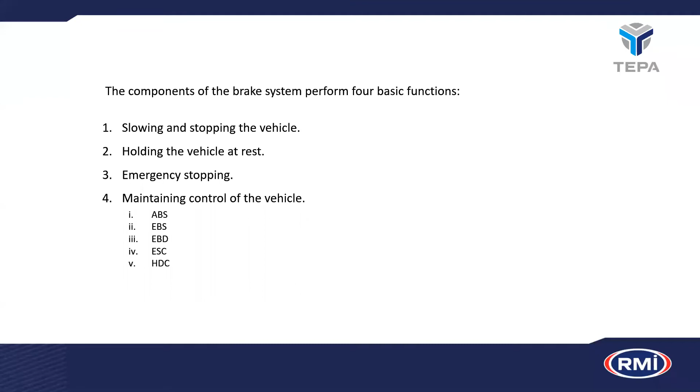So let's look at brakes and the basics. Basically, two things rubbing against each other under pressure equals friction. That's obvious - if you rub your hands together, you get friction. Friction causes heat. Science says that for every action, there's an equal and opposite reaction. So anything moving in one direction has got a force pushing against it, moving in the other direction.

Science also says that energy is neither created nor destroyed, it is only ever transferred from one form to another. The types of energy we deal with in a motor vehicle are kinetic energy, heat energy, sound energy, electrical energy, and potential energy - those are the five main ones.

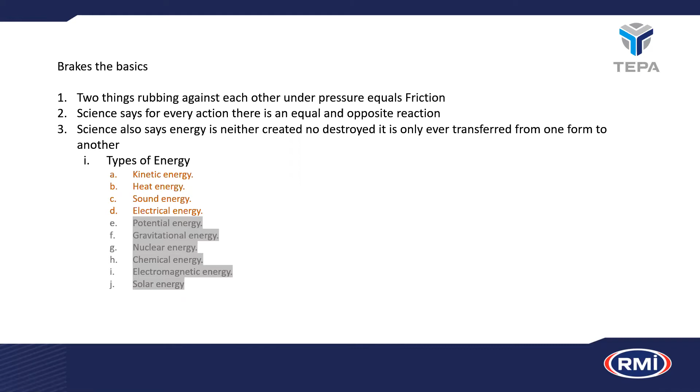In braking, we're specifically concerned with kinetic energy, and kinetic energy is measured in joules. The formula is energy equals a half mv squared. Half m is half the mass of the vehicle, v squared is the speed or velocity of the vehicle squared. So the energy of the vehicle is half the total mass times the speed squared.

Therefore, a 2-ton bakkie traveling at 120 kilometers an hour, in joules, would be calculated as: half of 2 tons is 1,000 kilograms. The velocity or speed squared of 120 kilometers an hour in meters per second is 120,000 meters an hour, divided by 60 gives you 2,000 meters a minute, divided by 60 gives you 33 meters a second.

We square that, we get 1,089 as a figure of meters per second squared. So then we multiply the two together and we get a total of 1,089,000 joules of energy.

Which is, in your terms, enough to boil 4 liters of water in 11 minutes using a 2,000 watt heater. So 11 minutes to boil 4 liters of water is the equivalent of what you use to stop your vehicle in the 2 or 3 seconds it takes once you press the brake pedal.

By example and comparison, a Formula One car of 1,000 kilograms traveling at 240 kilometers an hour has 28 times the amount of joules that needs to be dissipated during braking. Hence, if you watch Formula One, you see the brakes glowing red hot when they come into a corner at high speed, because of the amount of energy that vehicle is displacing.

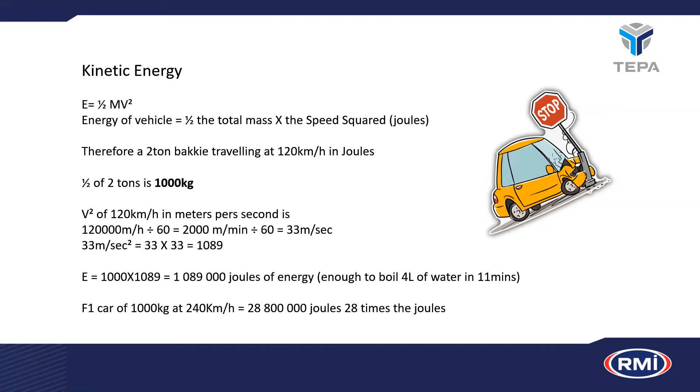Let's have a look at the brake components now that we've set the scene for how significantly important braking is to us. In the disc brake caliper assembly system, we have the bleeder screw, caliper, dust boot, piston seal, piston, brake pads, anti-rattle clips, and rotor. That is a complete disc brake caliper assembly system.

All the components that I mentioned there have to work together correctly at the same time. Brakes are not merely the brake pads that you see in the center. It is all these bits and pieces that are components of the caliper, all have to work together and perform a function at the same time for the brakes to be effective.

If there's any form of dust, dirt, rust, grunge and grime inside the caliper on any of the surfaces, the brakes will stick, the brakes will squeal, the brakes will not function properly. You'll have vibrations that feel like metal to metal, even though your brake pads are still thick enough. So I reiterate again, the concern is that everything inside the caliper must be clean and functioning, and where necessary, correctly lubricated.

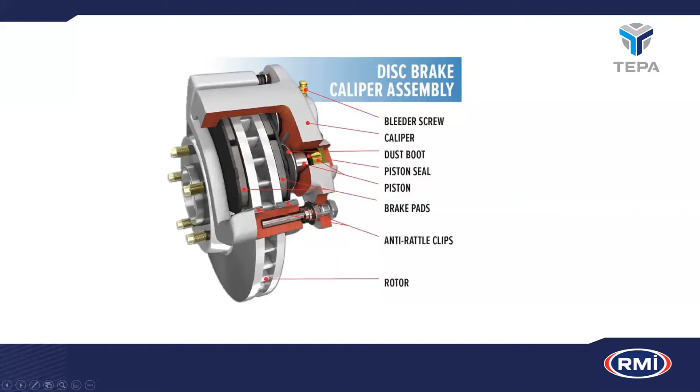In the drum brake system, you've obviously got the brake shoe, the wheel hub, the backing plate, and the brake drum. Inside, behind the wheel hub, you have your retaining clips, your return springs, and your wheel cylinder. All are, again, components that have to work together.

If any of these components are dirty or damaged or not functioning the way they should, you won't have effective braking. So in essence, when changing brakes, when doing a brake job, it's not sufficient to just change the friction material that you see and assume is worn out. All the components need to be checked carefully and replaced where necessary.

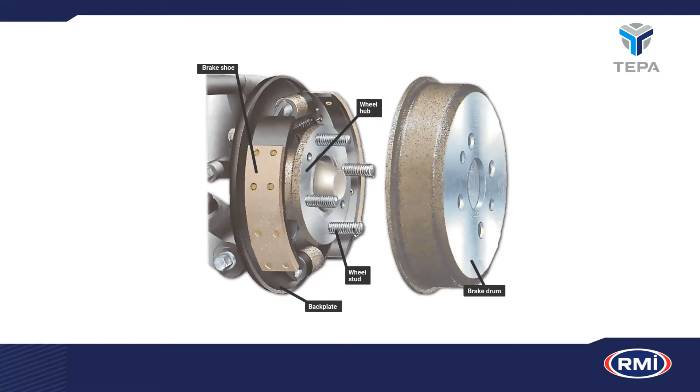So let's move on a bit more into friction material. In brake friction material, we have approximately 130 chemicals, with an average of between 22 and 35 of these chemicals used in different selections depending on the type of friction material the manufacturer is trying to achieve. In the mix, you have binders, abrasives, performance materials, fillers, and structure in the compound.

On the right-hand side of the picture, the greenish-looking image gives you a microscopic view of how those components are all mixed together. And if you had to take a photograph and magnify a piece of cake, for instance, or a biscuit, you'd see a very similar pattern where all the components are mixed together and form a compound similar to brake friction material.

If we look at the surface, what you see below is basically a gray surface with a little bit of undulation across it. On the right-hand side at the bottom, you can see what that surface looks like when you magnify it deeper, and you can see the structure of the material is rough. It looks rough under magnification, and you have places where debris collects, and places where the material can be at different levels.

Now why do we use so many different materials in the structure of a compound of friction material? If one was to make brake friction material purely out of mud, for instance, sand, you'd get good braking, but you'd have very high abrasion of your brake discs and drums. So the friction material is designed to operate at all different temperatures, under all different pressures, speeds, and loads, and still dissipate the heat that is generated.

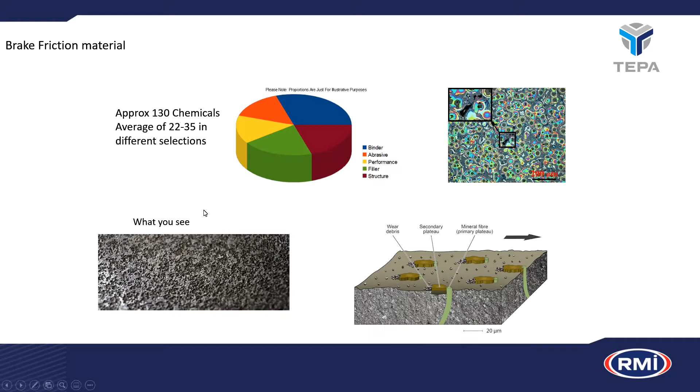I'm not going to go into the details of how the heat is generated. Suffice it to say that during brake friction, a tremendous amount of heat is generated during the pressing of the brake pedal. If we look at the brake discs and drums, brake discs look smooth and shiny, and brake drums internally look smooth and shiny.

This is where it's vitally important to understand how brake friction material works. Brake friction material embeds itself into the cast iron so that when you apply the brakes, the friction material embedded into the cast iron bonds with the friction material on the brake pad, causing the friction and stickiness that allows the stopping force to be generated.

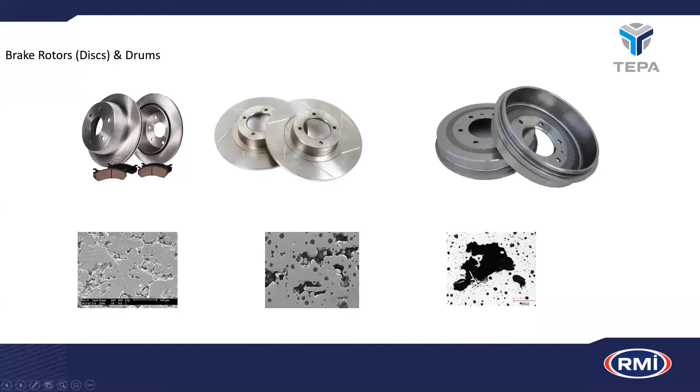I wanted to put this across in visual terms, these are the places where the brake friction material gets bedded into, and I'll talk about bedding in a little while. If we look at the brake rotors, discs, and drums, when you change brake pads and take the wheels off, you see that the discs or drums are rough, worn, and look uneven.

So in context, a flat surface is important, yes, but the real importance of skimming brake discs or replacing brake discs is to get a fresh, clean cast iron surface.

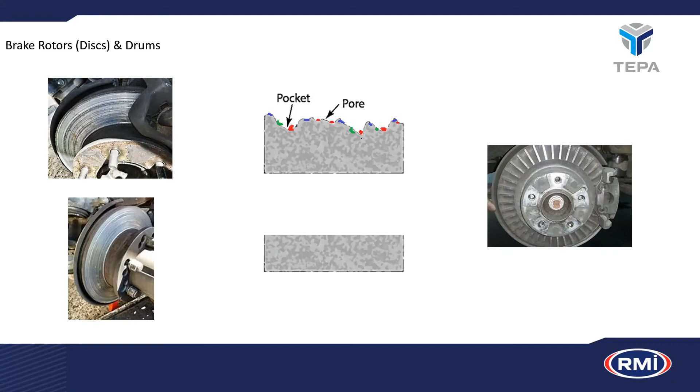I did talk about the importance of the brake pads, calipers, and discs being clean. Now, what I want to point out when you're doing a brake job is that very often the practice is to loosen one of these slide pins, flip the caliper open, pull out the old brake pads, push in the new ones, flip the caliper closed, and do up the opposite slide pin, tighten it up again. Guys, ladies, gents, these need to be removed completely, cleaned properly, and lubricated with CV grease, not copper slip. These slide pins are the cause of more issues around worn brake pads, squeal, graunching, and grinding sounds than anything else.

If these slide pins don't move freely, your brake pads will stick, your brake pads will not last, and your brake discs will also be compromised—let alone the fact that your safety and your life is at risk with these slide pins not moving smoothly and freely within the braking system.

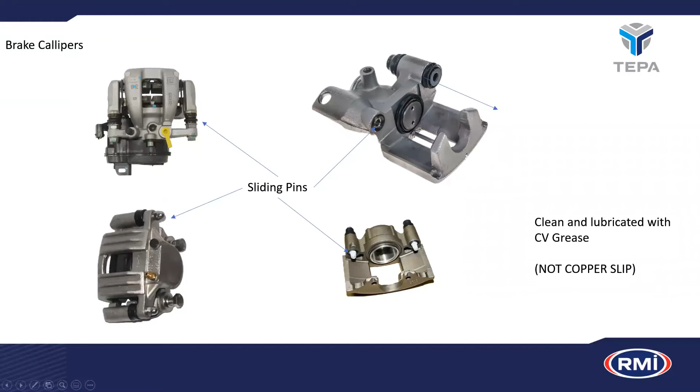Furthermore, when replacing brake pads or brake shoes on a vehicle, it's also important to replace the spring clips present in certain styles and makes of calipers. These spring clips are not made for life—they are wear items and should be replaced every time you change brake pads or brake shoes. In many cases it's not done, leading to caliper rattle, squealing, unacceptable noises, and also adding to the accelerated wear characteristics of the brake friction material itself.

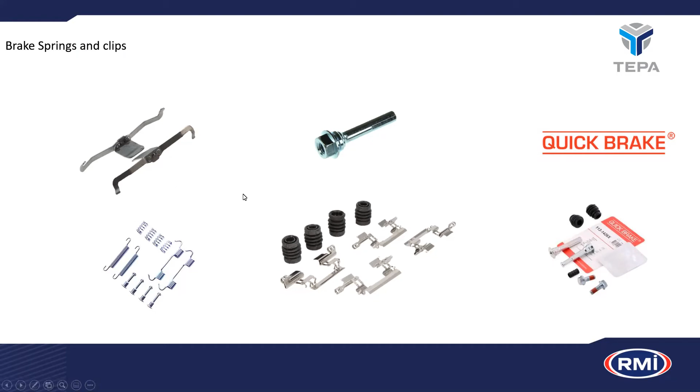And these retaining clips - I'm not one to give plugs to different companies, but Quick Brake is a company that manufactures these spring clips in kits, retaining clips in kits, and provides them into the marketplace. People more often than not overlook the necessity of these being replaced.

So let's move on to brake fluid, also an overlooked issue within our vehicles. There are essentially four different main types of brake fluid. You've got DOT5 silicone brake fluid.

DOT5 silicone brake fluid is never to be used on a road-going motor vehicle for two reasons. Firstly, if you try and bleed silicone brake fluid in your vehicle, you will battle for many, many hours. But the second part is the brake rubbers, seals and hoses within the brake system on the vehicle are not designed to be compatible with silicone brake fluid. So please ensure that you never use DOT5.

DOT3 is the older version of brake fluid, a glycol ether brake fluid, and it has a boiling point of 205 degrees Celsius. And then you have DOT4 brake fluid, which is 230 degrees. It's a glycol ether or a borate ester material.

DOT5 I've spoken about. And then you get what is strangely enough known as DOT5.1. DOT5.1 is again a glycol ether product, but it has the same temperature characteristics of DOT5 silicone. So don't ever confuse DOT5 with DOT5.1 brake fluid. DOT5.1 is compatible to be mixed where necessary with DOT3 or DOT4. It's specifically intended to be used in newer vehicles with ABS and any of the new technology systems, because of the design of the material. The components within the fluid are there to provide lubrication into the system.

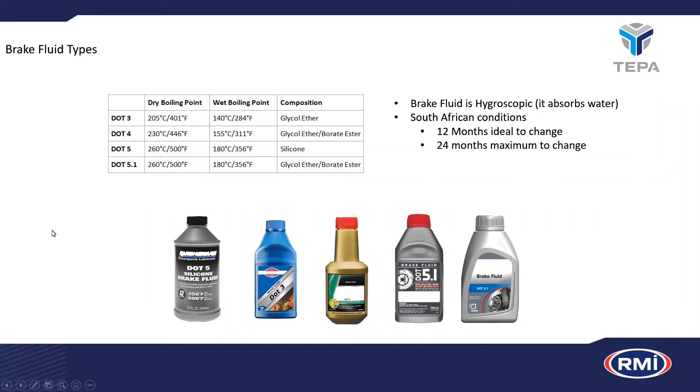I'll show you on the graph now where Shell did tests on DOT brake fluid, testing DOT4 and DOT3 here. They tested different ones, and you can see with the ingress of water, which it picks up through ambient temperatures, humidity, rainfall etc. that we have in South Africa, we have a very high level of absorption of water into the brake fluid. You can see here that anywhere from 4% onwards, you've more than halved your brake fluid boiling point.

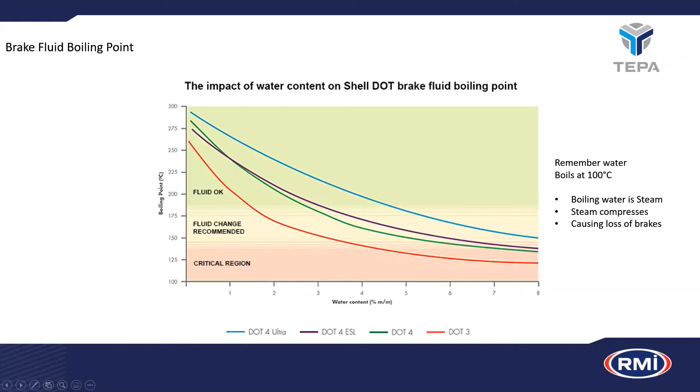And remember, as you get down into the lower reaches, water in the brake fluid will boil at 100 degrees Celsius at sea level. The moment water boils, it becomes steam, and steam compresses, causing a loss of brakes. It's as simple as that. Your brake system runs anywhere up to 400 degrees Celsius at times for short spaces of time, so having a higher percentage of water in your brake fluid is critical - it will cause a critical failure of braking. So changing brake fluid, maintaining the high boiling point, is vitally important to your safety and the safety of other road users, and also keeps the brake system clean internally.

The rubber, especially in the rubber hoses - the pressure that goes into those hoses is relatively high, and they are stretching and compressing, stretching and compressing. They cannot be expected to last forever, and in terms of your own safety and good health, it's worth making sure that they are in good condition.

Going into a bit of brake technology now, if we look at ABS: when you press the brake pedal, with an ABS system the intention is to stop the brakes from locking, and instead of ending up going straight ahead because your wheels have locked up and skidding, the intention is to allow the wheels to continue rotating under braking so you have directional control.

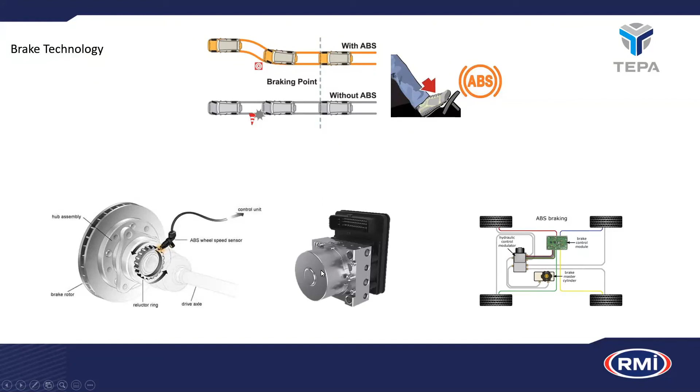It will either release or increase brake force as necessary to keep the wheels rotating with the greatest amount of retardation available. So you have a brake control module, you have the master cylinder, and then you have the hydraulic control modulator, which is the real muscle behind the ABS system.

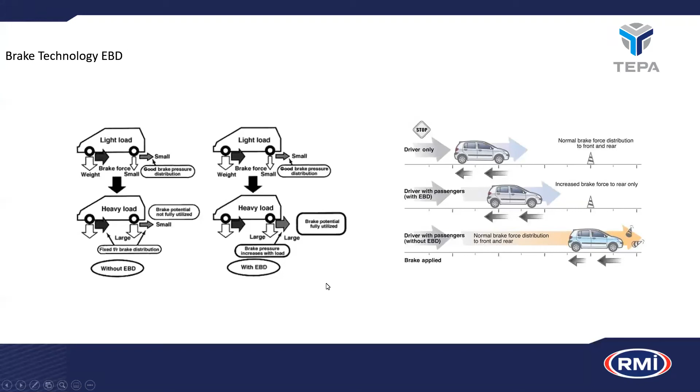Electronic stability control is around how the brakes are used to allow you to keep on the path you want to keep on, and not understeer or oversteer. Oversteer is when you turn in too tight, understeer is when you're going out to the side.

It all combines with similar functions of ABS and EBD, where the computer is measuring where wheels are slipping, where wheels are rotating faster than others, and it keeps you under control so that you maintain that control, all managed through the braking system of the vehicle.

Again, if your brake system is not properly managed and maintained, these systems can't work. Your EBD, your ESC, your ABS just cannot do what it's supposed to do, irrespective of the complexity of the computer control systems.

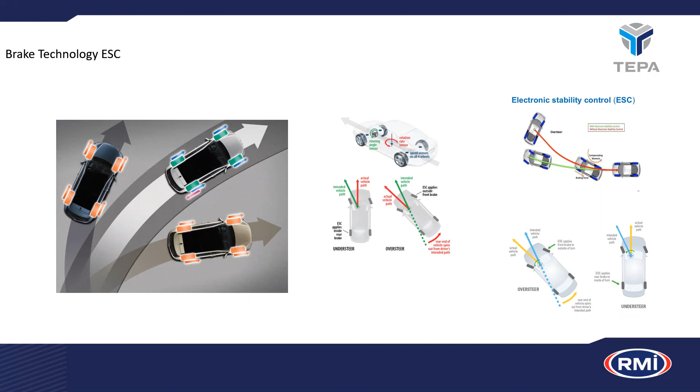Hill descent control - I said I'd mention it. This is obviously for the 4x4 enthusiasts going down hills. Again, this relies on the brake system of the vehicle to control wheel slippage and make sure the wheels are controlled at a speed that is desirable to the vehicle or the terrain it goes down. So the braking system is crucial to how hill descent control will work.

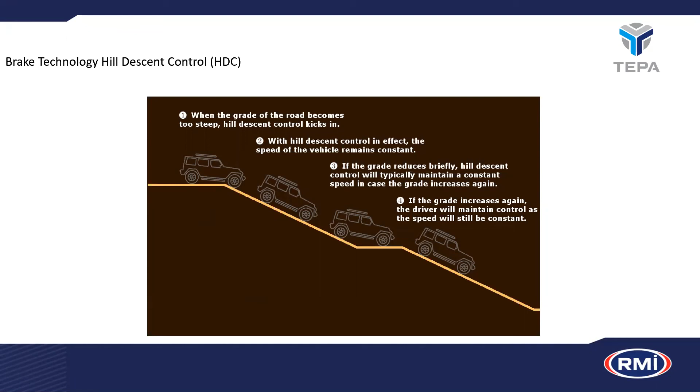Brake inspection: a solid brake inspection takes into consideration, first off, brake fluid level. If the brake fluid level has dropped, that is a solid indication that the brake pads or brake shoes are worn. If the handbrake lever height is excessively high, the rear brakes need adjusting.

Brake pad thickness - too thin means end of life. Brake disc thickness - too thin means it cannot displace the heat and it will cause fade. In other words, the brake disc will overheat and your brakes will fail.

Brake hoses and flexibility: too stiff means perishing, too expansive means broken internally. Hold the pipe in your hand and get someone to press the brake pedal. If it expands more than you think it should, consider that the internal pipe could be broken.

Brake shoe thickness: too thin means end of life. Brake drum diameter is exactly the same as the disc. If it's too big, it cannot displace the heat and it can expand beyond capable torque friction levels.

Cylinder leaks will provide loss of pressure. A lack of brake booster vacuum means that you'll have a hard pedal.

Setting the rear brakes correctly allows the front to work. If the rear brakes don't work, they can't assist the front, and then you'll have increased wear on your brake pads on the front. The first thing you'll say is that the front brake pads are rubbish, they don't do the job, meantime the rear brakes are not doing their side.

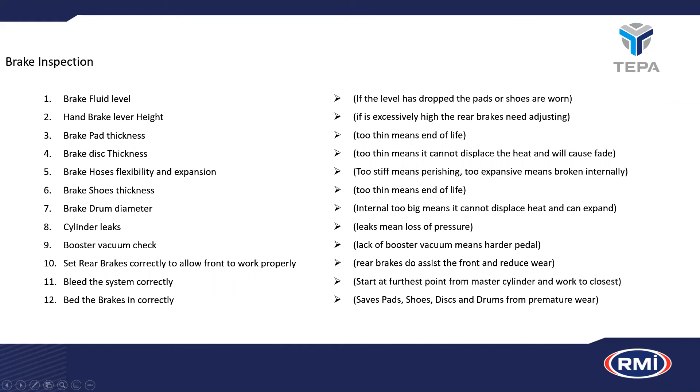Bedding in the brakes correctly is crucial to supporting your brake system. We have a simple system where we refer to brake bedding: at 60 kilometers an hour, reduce speed by braking gently to 10 kilometers an hour. Repeat that 3 to 5 times.

Then travel at 60 kilometers an hour for 5 to 10 minutes to allow the brake system to cool again. Then go back to doing another 3 to 5 times of 60 kilometers, slowing to 10 kilometers an hour with gentle braking. Then travel at 100 kilometers an hour for 5 to 10 minutes to allow everything to cool down again.

During the process, do not stop anywhere, do not stop completely at any point in time unless absolutely necessary. You cannot rush this process with higher speeds or harder stops. Repeat, if possible, once all brakes have cooled down completely.

If you can do this section once, great. If you can do it twice, even better. Your brakes will bed. Going back to the surface of the brake friction material and the brake discs or cast iron, remember I spoke about bedding in - this allows the brake friction material, the brake pad or shoe, to put a layer of its own material down into the cast iron to allow it to work.

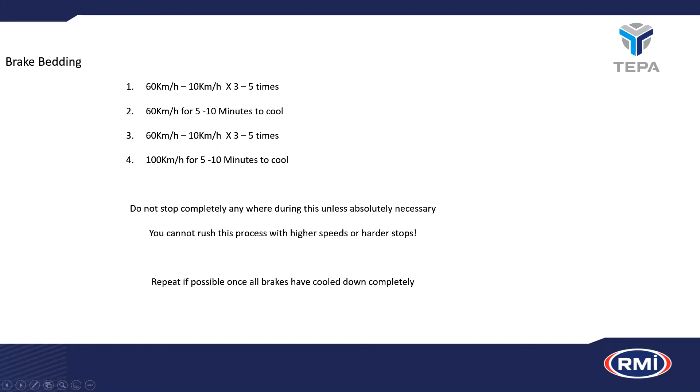So, in conclusion, brakes and components have a lifespan. Brakes and components wear. Braking is safety critical - it's life and limb. Budget in the vehicle maintenance plan for regular brake inspection.

Inspect every 8,000 kilometers when doing your rotation, balancing, and alignment, as I said in the last session about wheel alignment. Budget for brakes to be replaced roughly every 60 odd thousand kilometers. If they're not lasting that long, you need to make sure your system's doing what it should. That's not a guarantee of 60,000 - it's just a suggestion. They may last more, they may last less.

For the best value, do the job properly every time as well. Please, guys, it's important to do the job properly or have the job done properly by somebody. Don't let shortcuts come into your braking system.